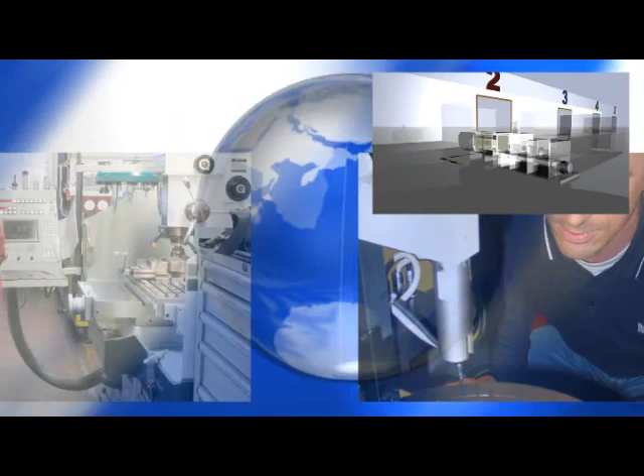Bucher Hydraulics, competent system partner. From the design to a complete machine, we support our customers with expertise and technical competence. As an experienced system developer, Bucher Hydraulics puts emphasis on fair partnership and good teamwork.

Enjoy cooperating with us. In this way, we develop proper solutions with you. If required, we'll turn the world upside down for you. Individual solutions, also for niche products.

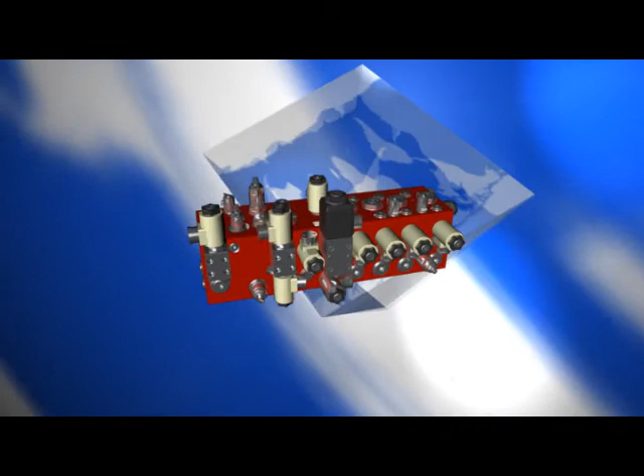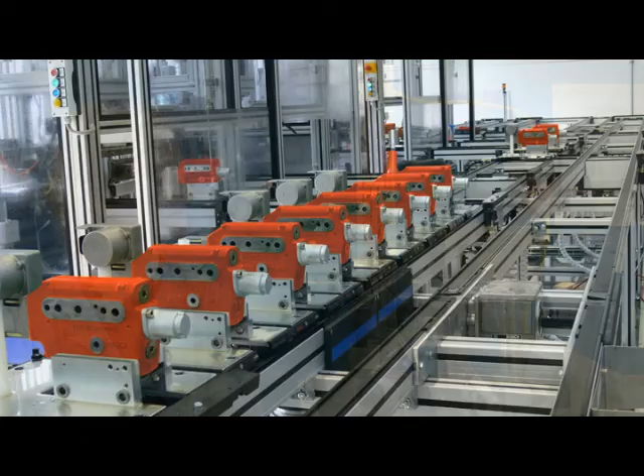Even here, you can count on our strengths. In time, high skills, optimum solutions. The basis for your and our success, we work hand in hand. Experienced, reliable, fair.

Quality has an origin. Continuous technical innovation since Bucher's foundation in 1923.

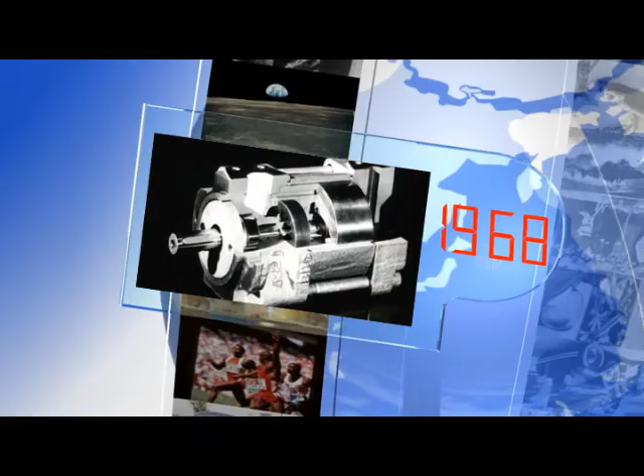1952, Bucher paves the way into oil hydraulics, initially for tractors. 1968, introduction of the internal gear pump to the global market. 1994, Bucher expands by integration.

Visions for the future. We are open for your ideas. Bucher Hydraulics, innovative in the past and in the future, open for motion and progress.

Here we show you a selection of applications for a wide product range.

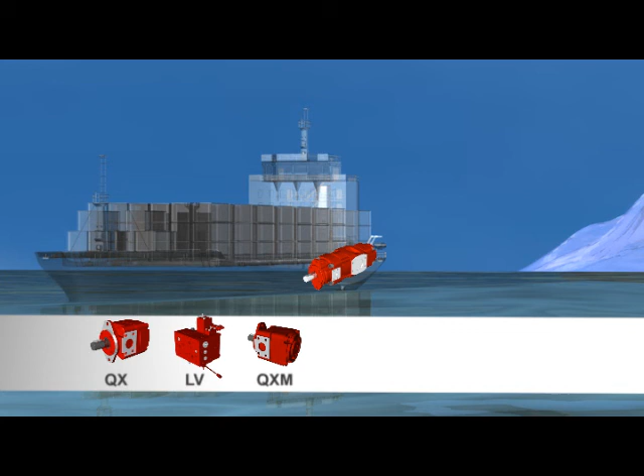Gear pumps for oil supply to horizontal and vertical lifeboat winches. Proportional valve technology for winch control. Internal gear motors for winch and ballast pump drive. Internal gear units for the steering gear. Proportional valve technology for the steering gear. All these components have the certification required for applications in marine hydraulics.

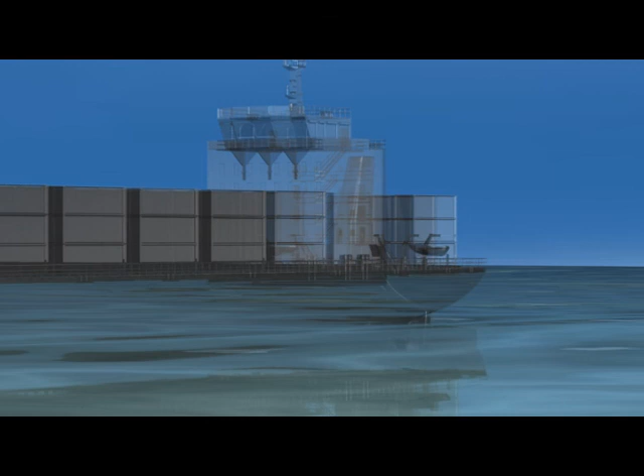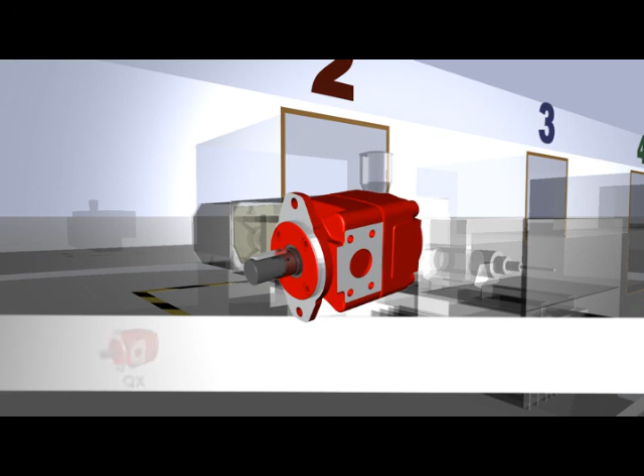Internal gear pumps for oil supply. Internal gear units for direct cylinder actuation. Load holding valves for mold locking functions. Standardized directional valves for controlling operational hydraulics. Cartridge valves for individual solutions.

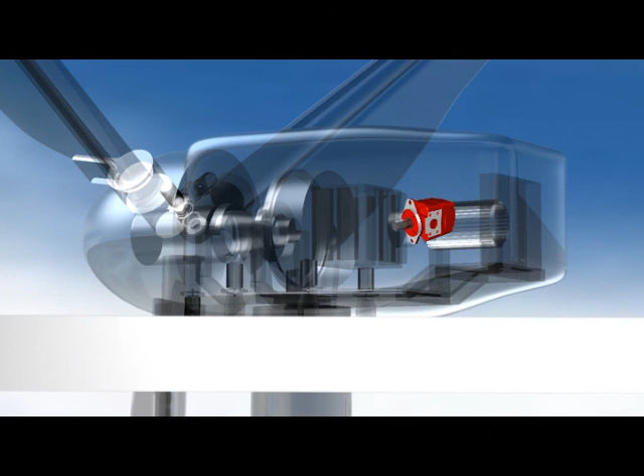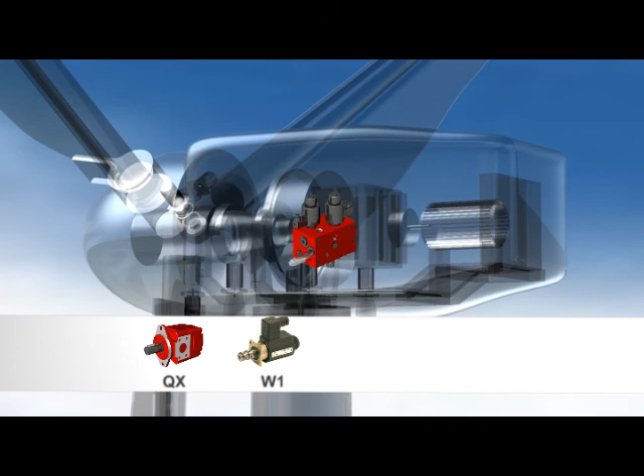Quiet and efficient internal gear pumps for oil supply, special poppet valves for blade adjustment, valve manifolds for controlling the spring-actuated brake, hydraulic power packs for oil supply to the azimuth adjuster.

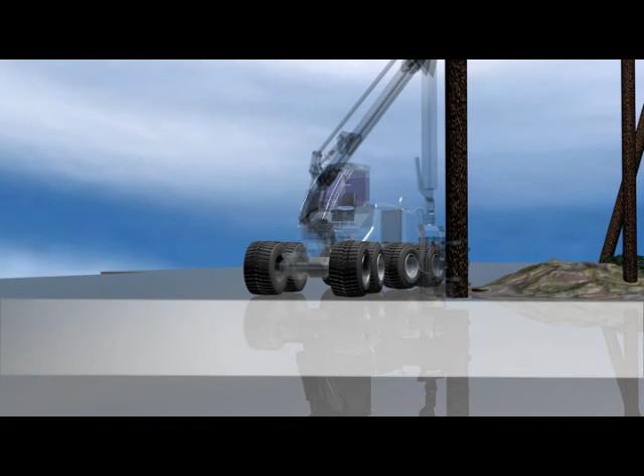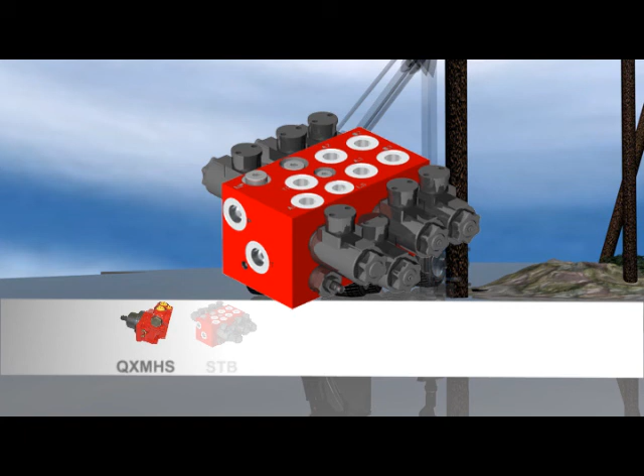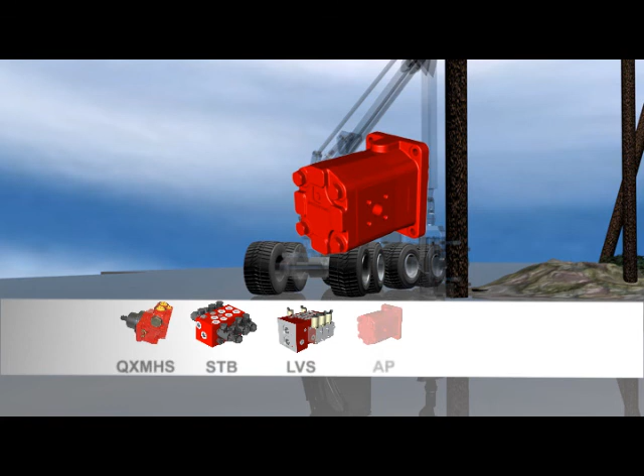High-speed internal gear motors for saw drives, valve manifold solutions for auxiliary functions such as locking the axles or rotating the crane, proportional valve technology for crane control, external gear pumps for supplying and feeding pilot-operated circuits, fan drive systems for optimum control of cooling system.

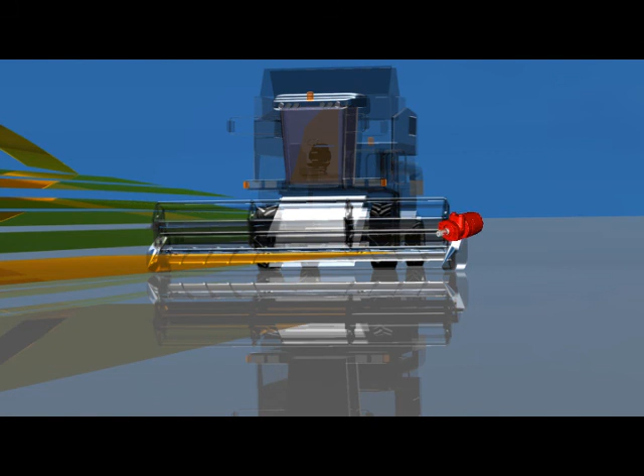Gerotor motors for powering reels, proportional directional valve systems for adjusting the cutting table, check and holding valves for leak-free cylinder locking.

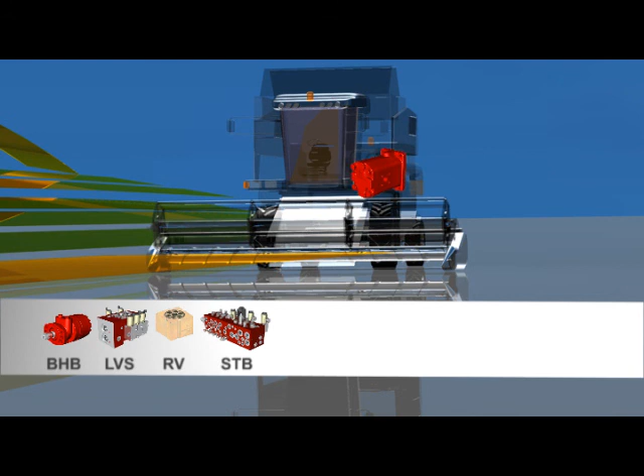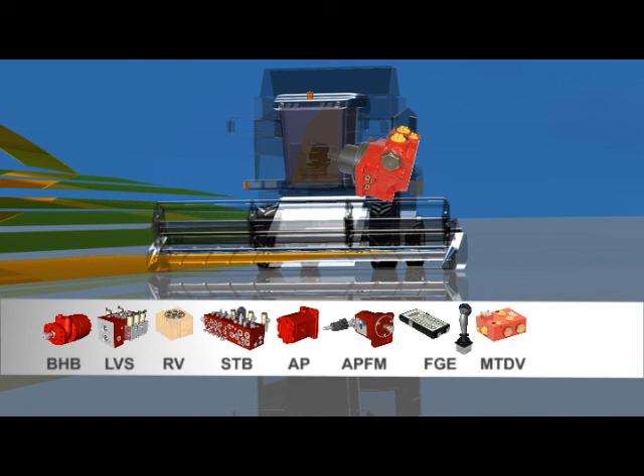Manifold valve solutions specific to certain applications, external gear pumps for hydraulic oil supply, reversible fan drive systems for cooling and blowing out heat exchangers, hardware and software for controlling and regulating the operational hydraulics, differential lock valves for the transmission, internal gear pumps for low-noise blower drives.

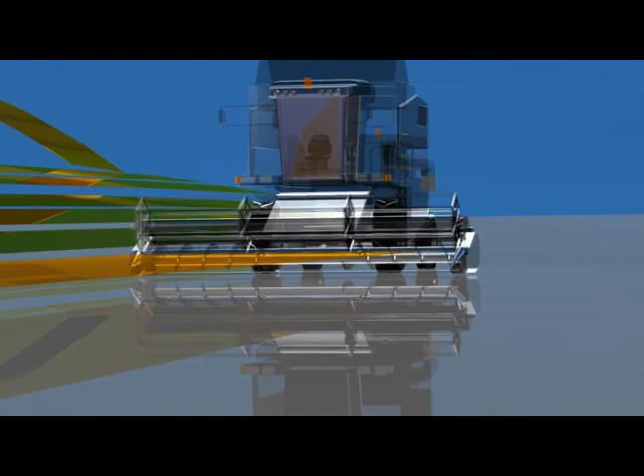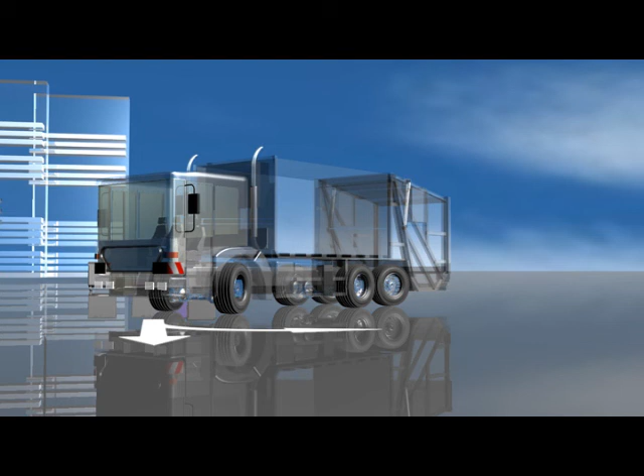Valve manifold solutions for the compaction plate and ejection cylinder, external gear pumps for oil supply to the loading gear, cartridge valves for individual operations.

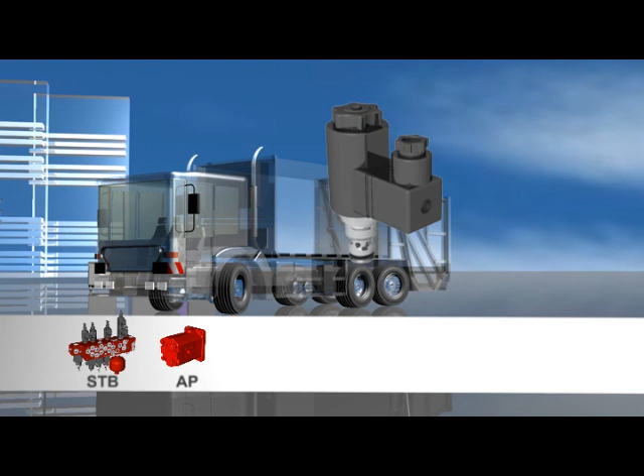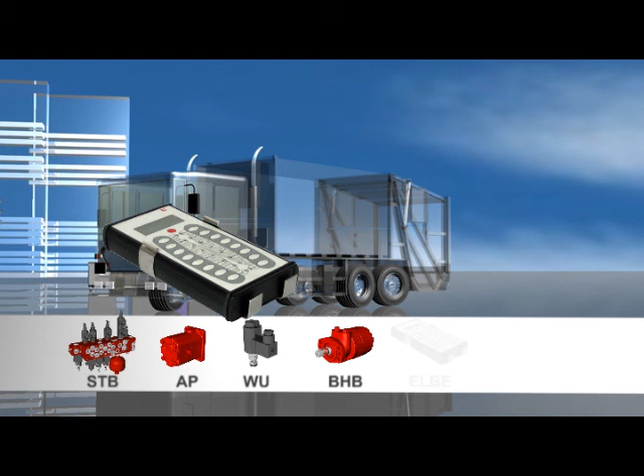Gerotor motors for various drive functions, hardware and software for controlling and regulating the operational hydraulics, proportional valve technology for the loading gear.

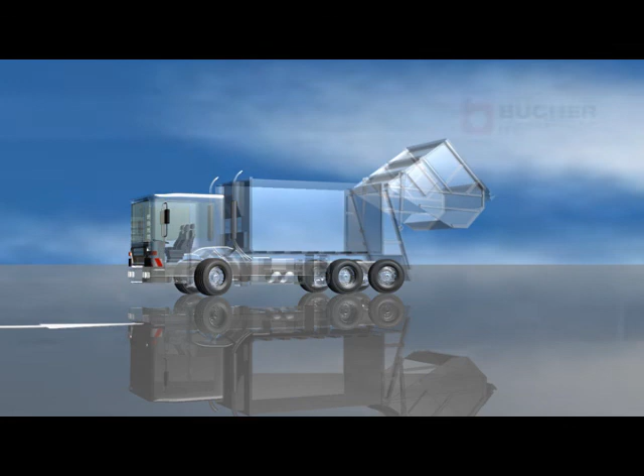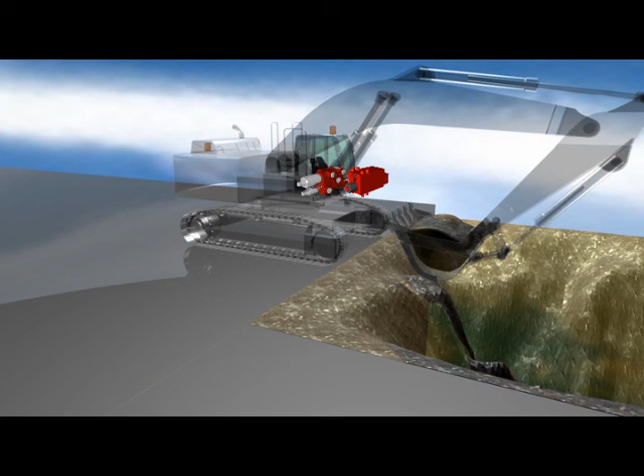Pipe burst and load holding valves for leakage-free loading compliant with the latest safety requirements, check valves, valve technology for operating hydraulics and auxiliary functions, travel brake valves for hydrostatic drives.

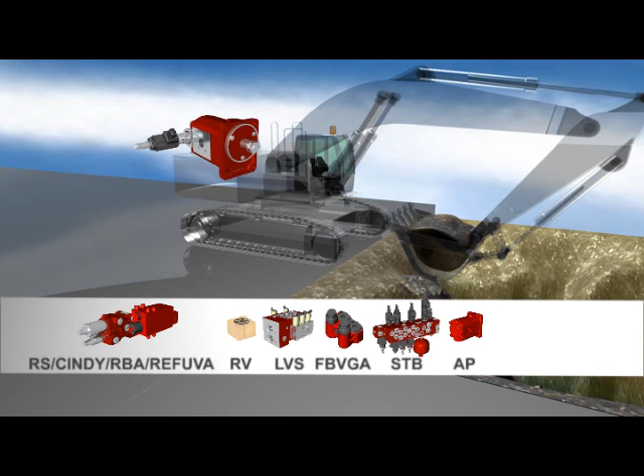Valve manifold solutions for pilot-operated oil circuits as well as for travel and slew brakes, external gear pumps for supplying low-pressure circuits, fan drive systems for optimum control of cooling system, Gerotor motors for rotating drives.

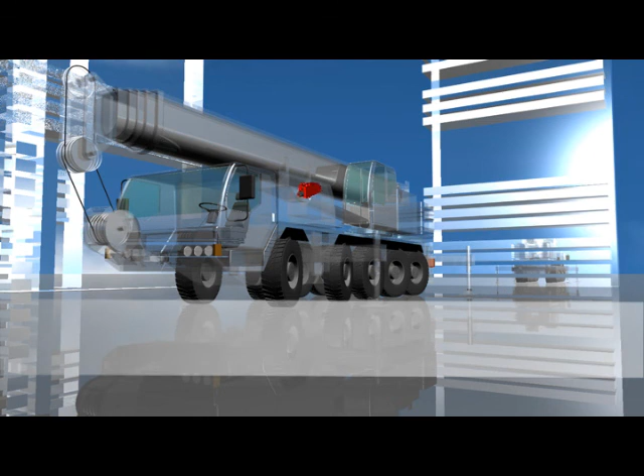Load-bearing valves for the telescopic cylinders, luffing and hoisting gear, proportional valves for superstructure actuation, special directional valve systems for slew actuation, valve manifold solutions for counterweight control, outriggers, hydraulic oil supply, cabin adjustment and many other applications, fan drive systems for optimum control of cooling system, flow divider for the steering mechanism, check and holding valves for hoisting gear and outriggers.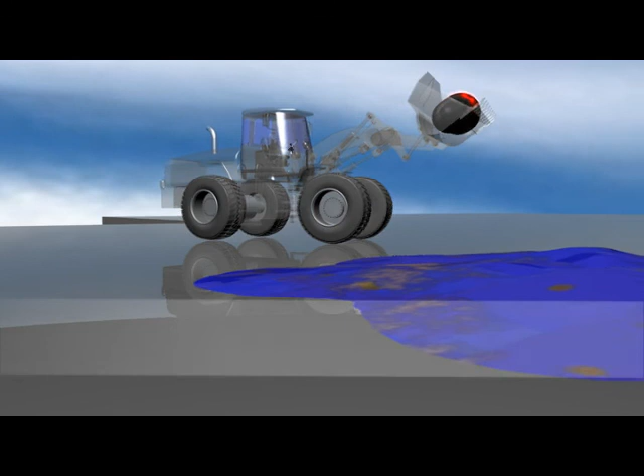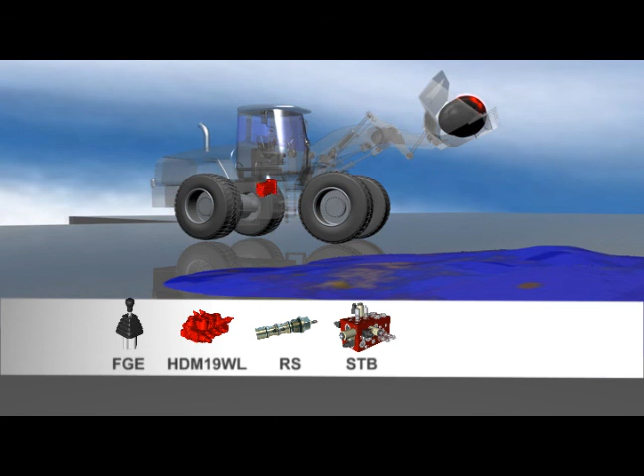Joysticks for front linkage control, directional valve systems for front linkage control, check valves for pipe rupture protection, valve manifold solutions specific to certain applications, external gear pumps for oil supply to the front linkage, fan drive systems for optimum control of cooling system.

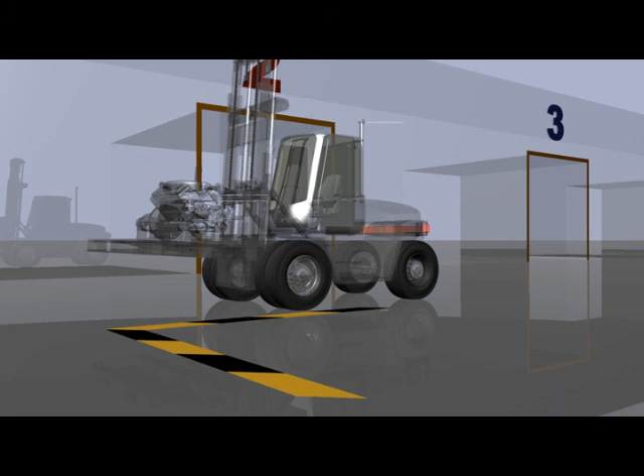Load holding valves for safe lowering, proportional valve technology, differential lock valves for the transmission, valve manifold solutions for hoisting and auxiliary functions, and steer-by-wire valves for multi-directional forklifts.

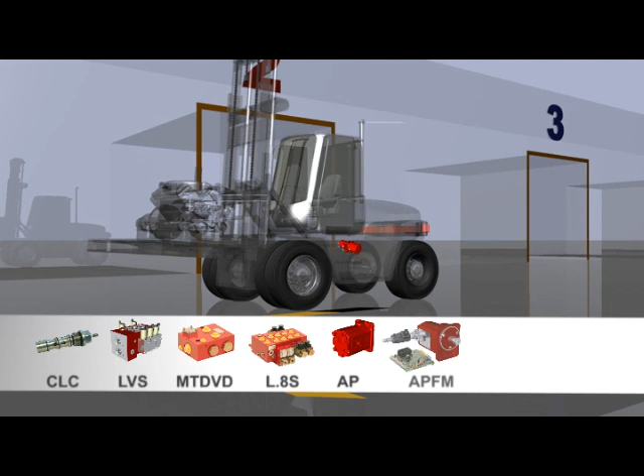External gear pumps for oil supply, fan drive systems for optimum control of cooling system, hydraulic power packs, tight seal proportional throttle valves for sensitive lowering operations.

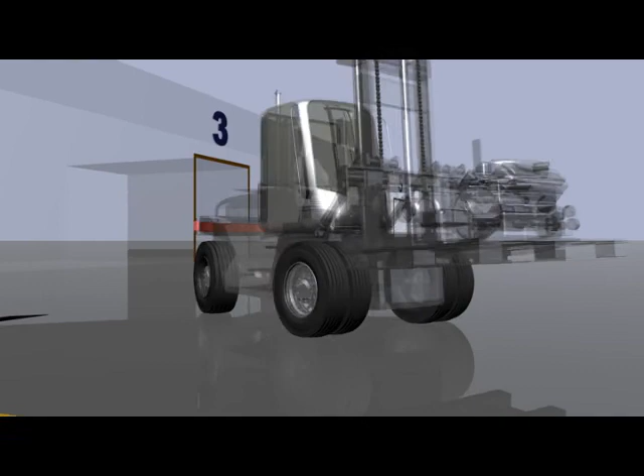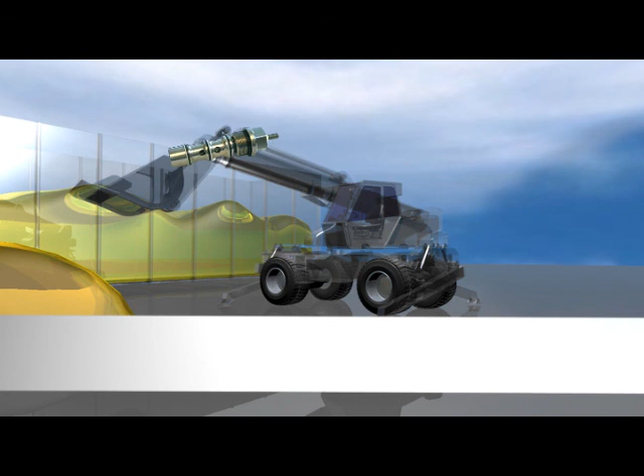Load holding valves for safely lowering the boom, proportional valve technology for controlling the boom, joysticks for controlling the boom, valve manifold solutions for supporting or locking out the floating axle, external gear pumps for oil supply to the steering gear, fan drive systems for optimum control of cooling system.

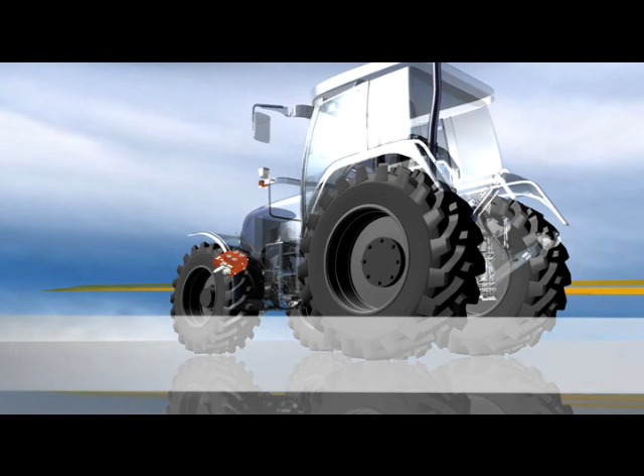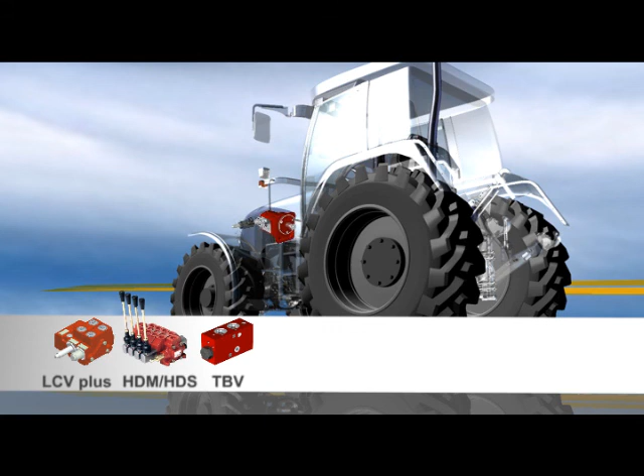Directional valve systems for the front-end hydraulics, directional valve systems for the power lift and additional functions, trailer brake valves, reversible fan drive systems for cooling and blowing out heat exchangers, external gear pumps for oil supply, proportional directional valves for the automatic steering device, hardware and software for controlling and regulating operational hydraulics.